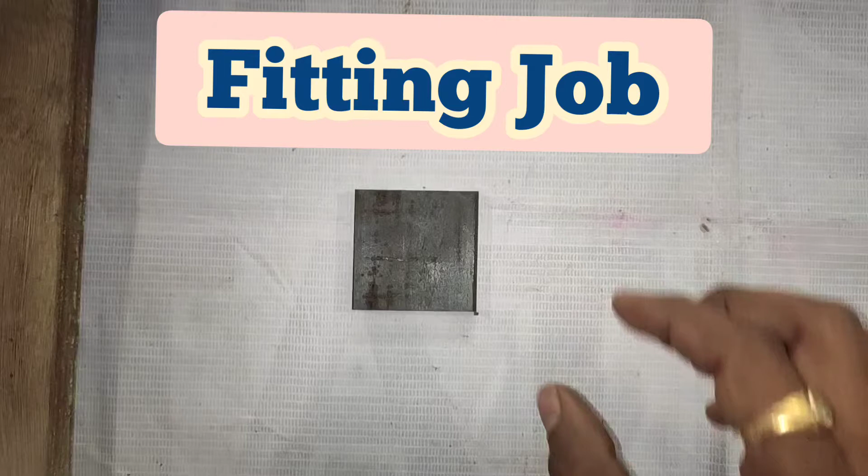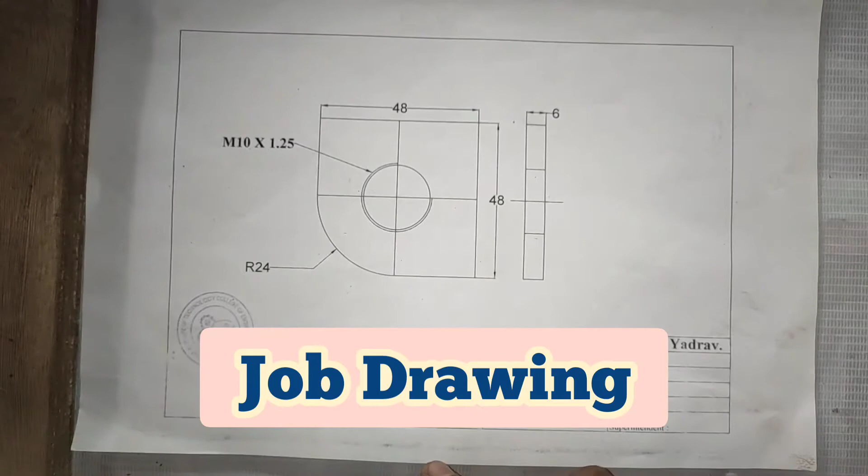This one is nothing but our initial raw material available with us. From this raw material, we have to do the final product of this fitting job. This is nothing but our drawing. From this drawing, we have to manufacture the job by using this raw material.

First of all, we'll take an overview of the tools which we are going to use for this practical. The equipments we are going to use are: first, the steel rule; this one is the vernier caliper; and this one is the digital vernier caliper. This first one is our steel rule.

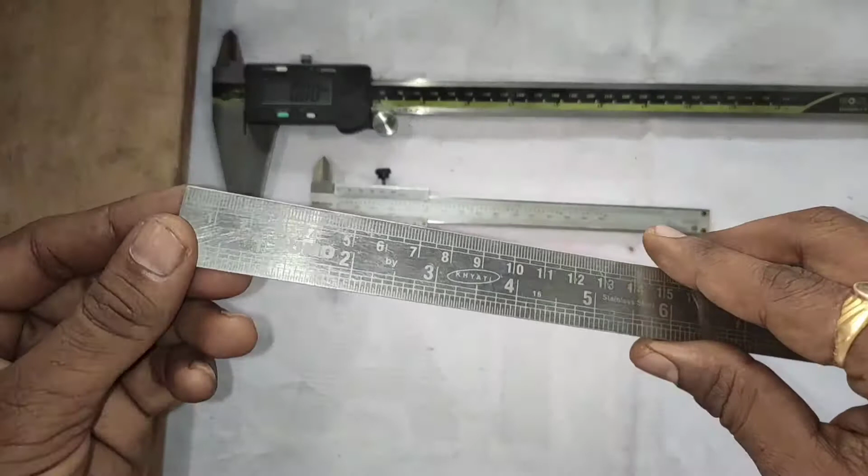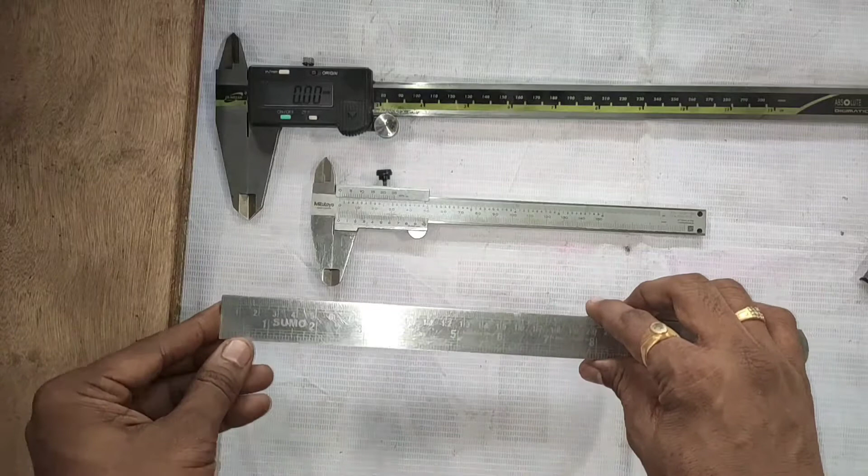Now if you observe on this steel rule, there are two scales. One is in centimeter, this particular one, and below that is in inches. This is the centimeter scale, and from this point to this point is 1 centimeter. Accordingly the scale is up to 15 centimeter and 6 inches. Now by using this steel rule, we have to take the initial readings of this raw material.

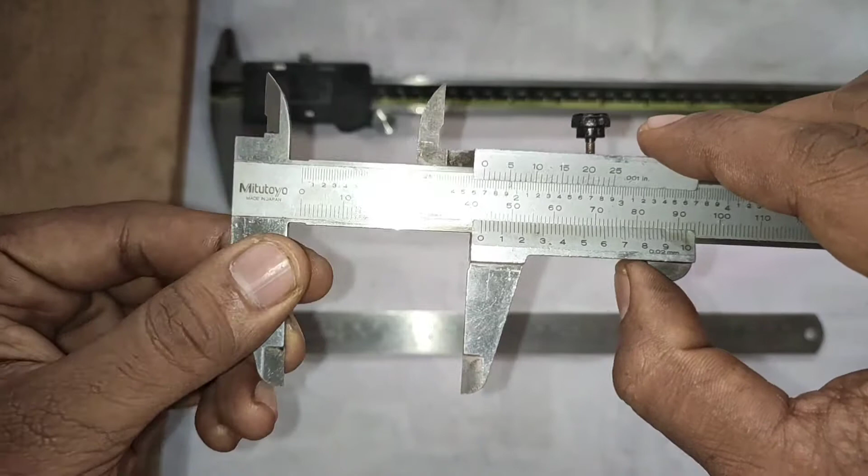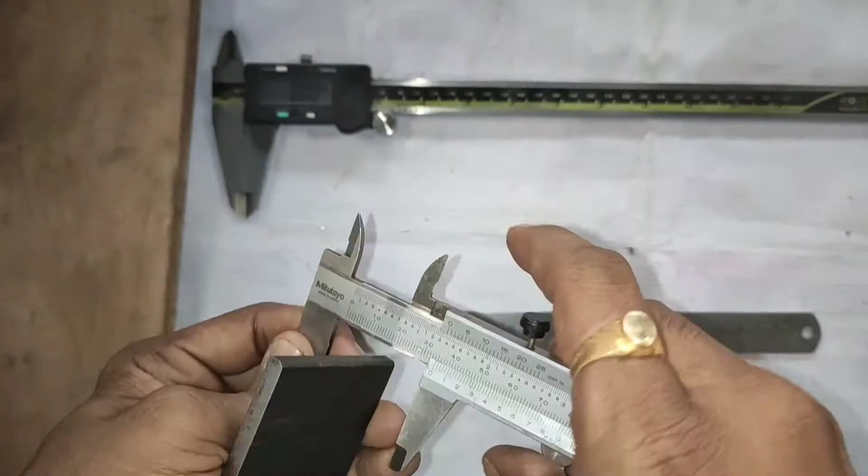Then next one is the vernier caliper. Why is this vernier caliper used? To get exact readings of the job, we have to use this vernier caliper. Now by using this vernier caliper, we have to measure the job readings, meaning different dimensions. This vernier caliper has two jaws, and in between these two jaws we have to place the job like this, and then measure the reading in this manner.

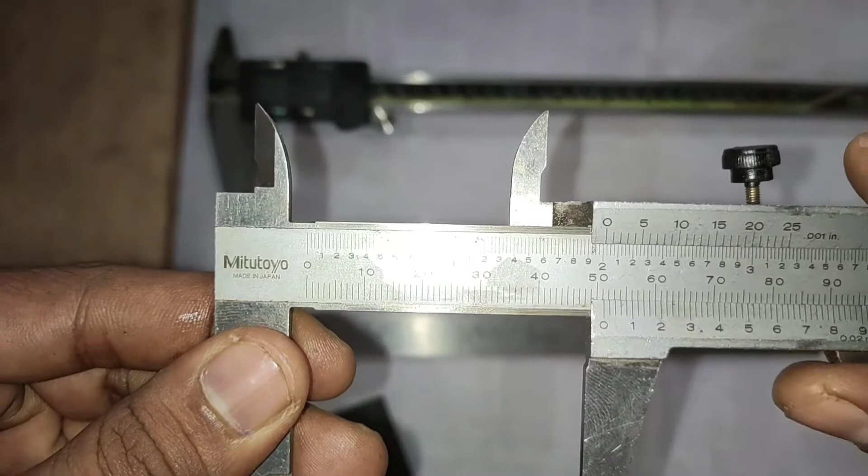Or if we have to measure the sides, we have to take the reading like this. Now if you observe on this vernier caliper, there are again two scales: this one is the main scale, and this one is the vernier scale. We have to take the readings at this zero point. If this zero point is matching at this 30 line, then that job has the dimension of 3 centimeter or 30 mm. If the job has the dimension matching exactly at 50, then that job has the dimension of 50 mm or 5 centimeter. So this is about the vernier caliper.

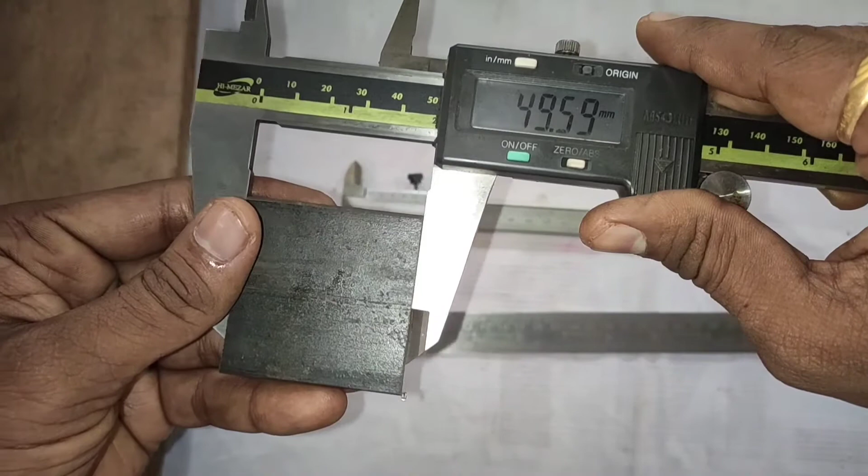Next, this one is the digital vernier caliper. This one is the manual vernier caliper where we have to take manual readings, and here the reading will be automatically shown on this digital vernier caliper. If you see here, in between these two jaws we have to hold the job and take the readings. If we hold the job like this, then the reading will be automatically shown on this display. So that is about this digital vernier caliper.

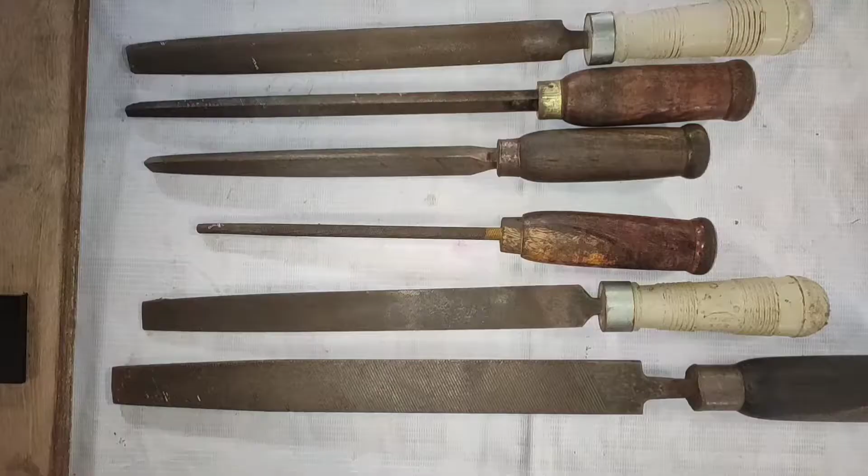The next tool is the files. These are the different types of files which we are going to use for this job. These files are used to remove the excess material from this job. Initially this job has the dimension of 50 by 50 by 6, meaning this dimension is about 50 mm, this also 50 mm, this also 50, meaning all dimensions are about 50 mm, and the thickness is 6 mm. Now from this job we have to remove the material, and for removing the excess material we have to use all these files.

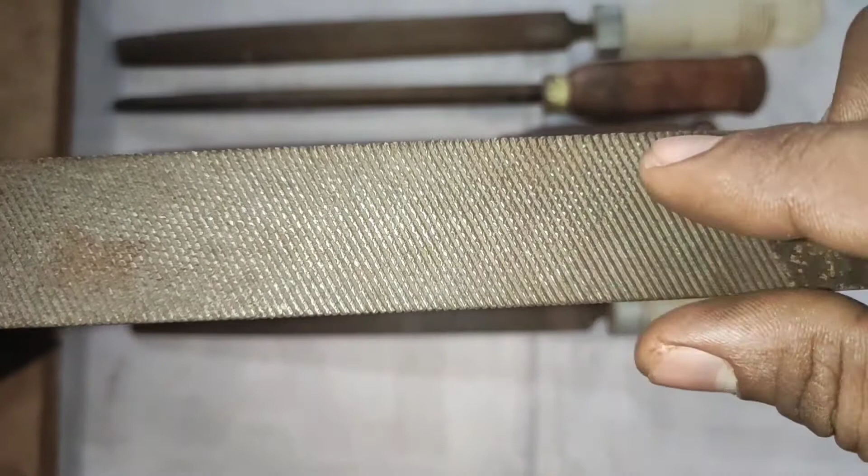The first one is the flat rough file. If you observe on this flat rough file, the markings or threads are somewhat big for this flat rough file. Then the next one is the flat smooth file. If you observe, the threads on this file are small, meaning the final finish will be made by using this flat smooth file.

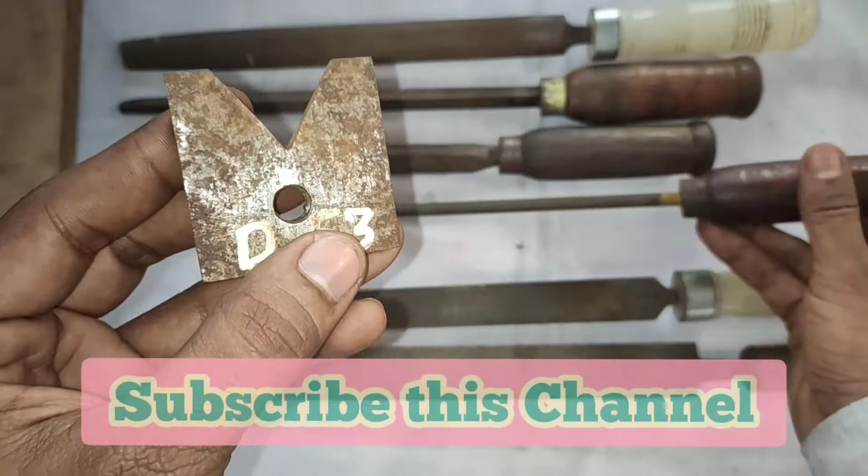This circular file is used if we have to make a hole in a particular job and make that hole smoother, we use this circular file. Now the next one is the triangular file.

If any job has a triangular shape like this, we use this particular triangular file. Then the next one is the square file.

If any job has a square shape, we use this square file. If we have to make a cut section like this square, we use this square file. For this particular job, if we have to make a smooth surface in between, we can use this square file.

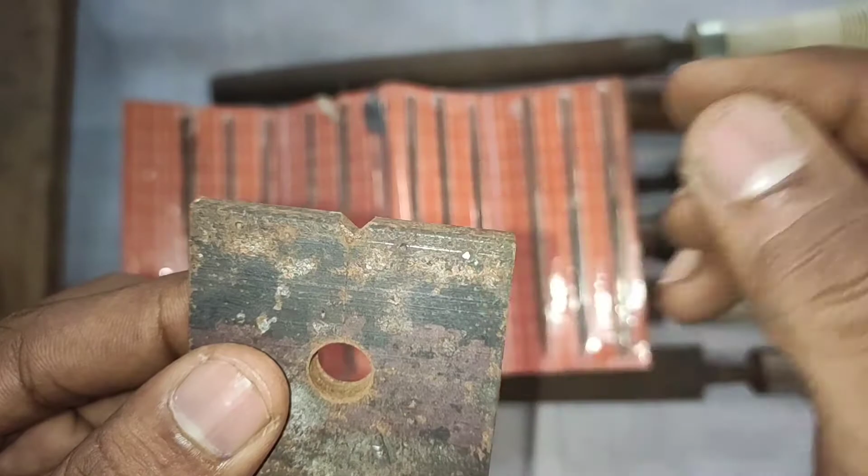Then this one is the half round file, which we use for this particular job. Also, these are different needle files which we use for making small cut sections in jobs. If you observe in this job, one small cut is made, so for that we use different needle files.

The next equipment or tools we are going to use in these practicals are: this one is the spring divider, then these are two punches, then a scriber, a drill, and this one is the tap wrench. Starting with the first one, the spring divider.

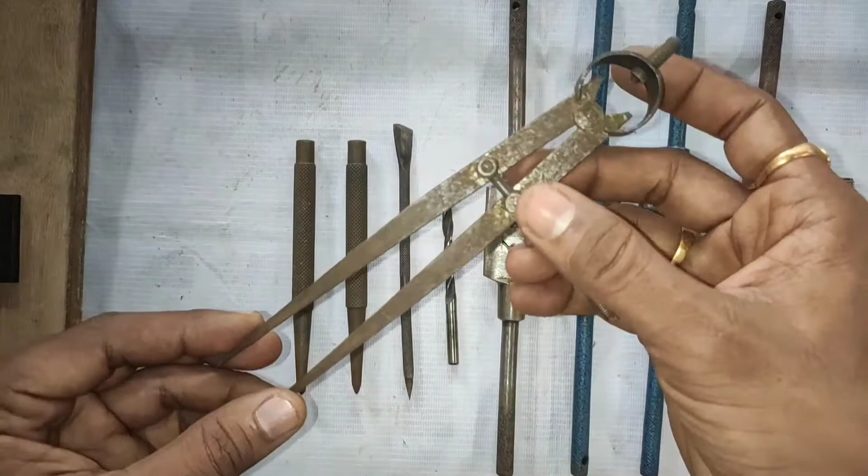If we have to make round markings, we use this particular spring divider. If you observe, with the help of the screw available on the spring divider, we can change its dimension.

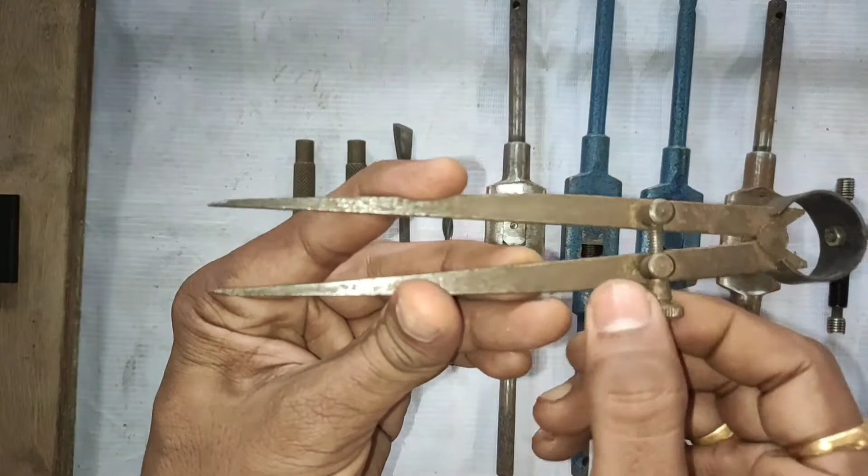If we have to mark a small marking on the job, we tighten this screw, and if we have to make larger markings, we loosen it. With the help of this spring divider, we can make round markings on the job.

This spring divider is a type of external caliper. With the help of it, if we have to make a round shape of 2.5 centimeters on the job...

If we have to make a round of 25 mm on this job, we use the spring divider in this manner. Here we take the 25 mm dimension between the two jaws, then place it at the center, and by using this spring divider we can make the round marking on the job.

Also, with the help of this spring divider, we can measure dimensions, or if any dimension needs to be measured, we can use this spring divider.

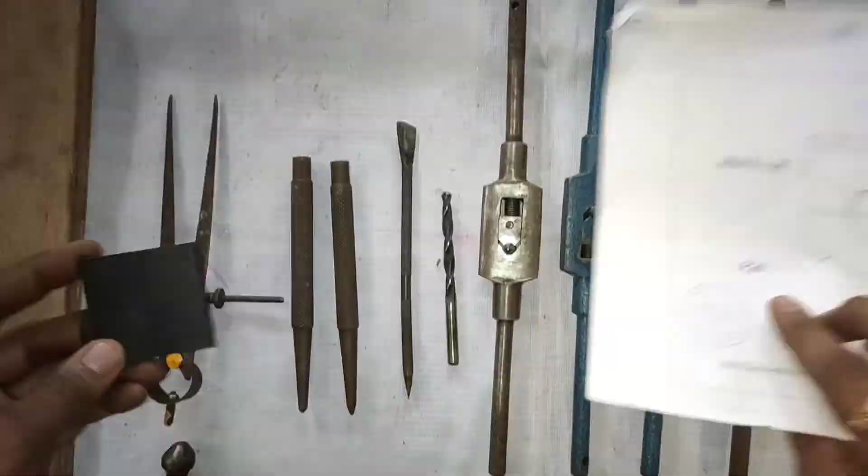Now where are the 45-degree and 60-degree punches used? On our job, we have to make markings at two points. If you observe, we have to mark the center, and also make side markings. For side markings we use the 60-degree punch, and for center marking we use the 45-degree punch.

Next one is the scriber. If we have to make longitudinal markings on the job, we use this particular scriber. By using this scriber and a scale, we can make markings on the job.

Okay, we have to make the markings like in this manner. So that one is nothing but about the scriber.

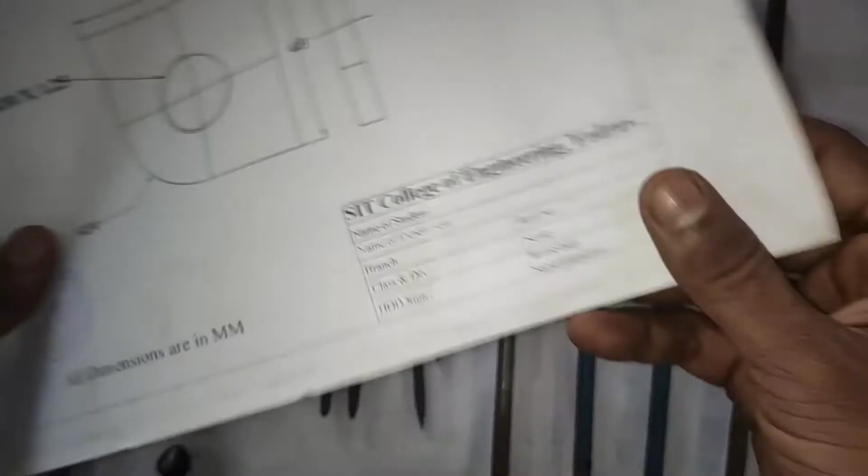Then next one is drilling. This one is nothing but our drilling tool, which is having a dimension of M8.5. Now this particular drill we have to use at this particular point, for making this particular hole we will use this particular drill.

Then next one, that is tap wrench. Now if you observe, this particular is nothing but the tap, and this particular is nothing but our wrench. So whatever holes we have made on this particular job, here we will make the hole by using this particular drill, and for the internal threading we will use this particular tap wrench. Now these are some types of taps - this one is first tap, this one is the second tap, and this one is the third tap, which we will use for this particular job.

Then here also this one is nothing but the ball peen hammer, which we will use for hammering purpose while punching. Means whatever punch which we are going to use on this particular job, for hammering we will use this particular ball peen hammer.

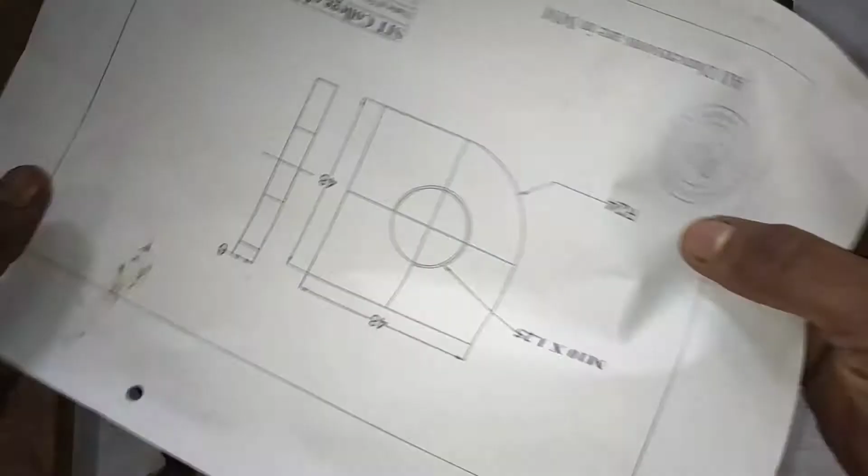Then next one, that is nothing but the go gauge and no go gauge. Whatever holes and internal threads we have to make on this particular job, that will be cross-checked by using this particular go gauge and no go gauge. This particular go gauge will pass through this particular hole, and this no go gauge, that it should not pass through that particular hole. That is for this go gauge and no go gauge, which we are going to use for this particular job.

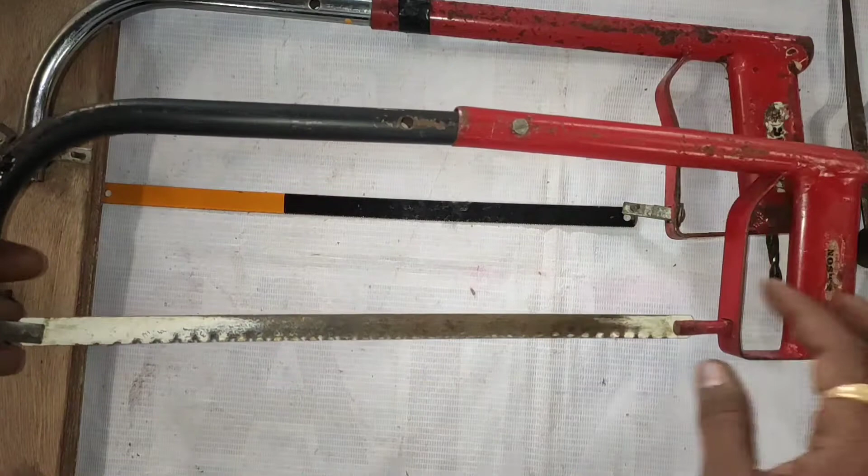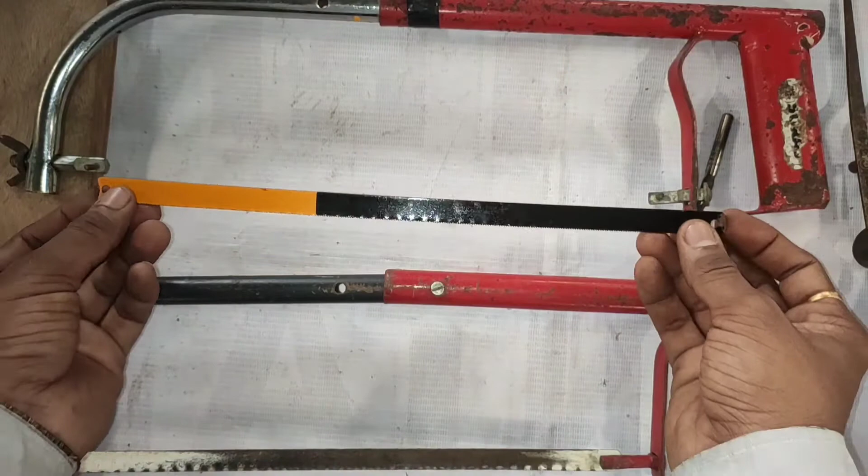Then the next equipment that we will use for this particular job is nothing but the hacksaw. Now here if you observe, this particular is nothing but the frame, and this particular is nothing but our blade. We have to fix this particular blade on this particular hacksaw. Now we will fix this blade - here in between these two holes we have to fix this particular blade.

After fixing, just we have to tighten this. By making this tightening operation, this particular blade is fixed on this particular hacksaw frame. Now this particular blade is having only one side blade, and this particular blade, it is two-sided - means from both sides we can cut the material.

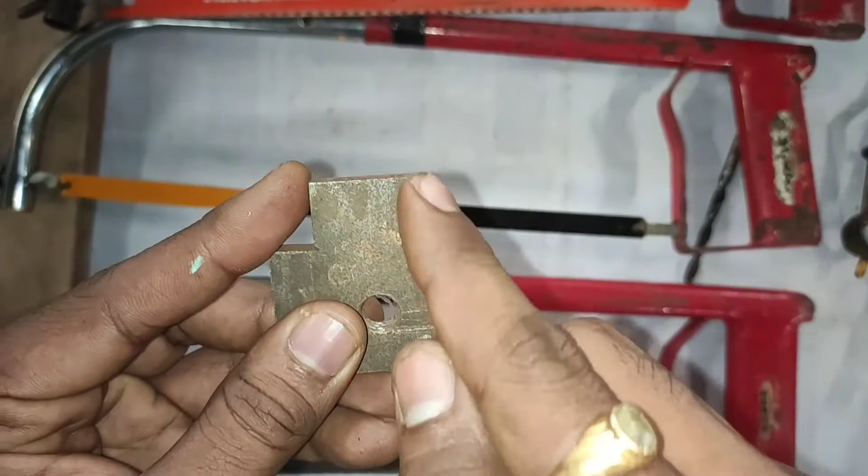Now where this particular hacksaw is used - if we have to cut the job like this, in that case we can use this particular hacksaw.

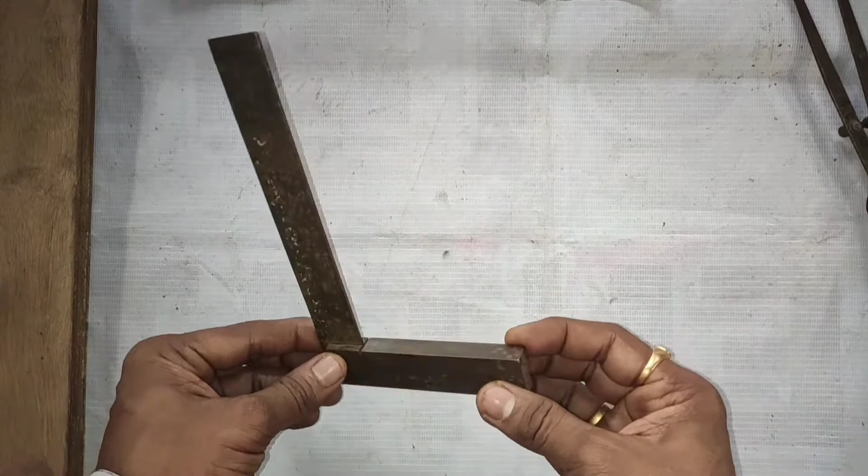The last equipment which we are going to use for this particular job is nothing but our tri-square. Now why this particular tri-square is used? To make all the angles at 90 degree, we have to use this particular tri-square. Means here we have to fix this job like this, and if there is no gap in between these particular faces, then that job will be at the right angle. Here if you observe, some space is there, so these two sides are not at right angle.

Now this one is nothing but our actual job drawing. Whatever the drawing, here if you observe, this particular is the side having 48 by 48, and the angle here is of 90 degree. So for making that angle at 90 degree, we have to use this particular tri-square.

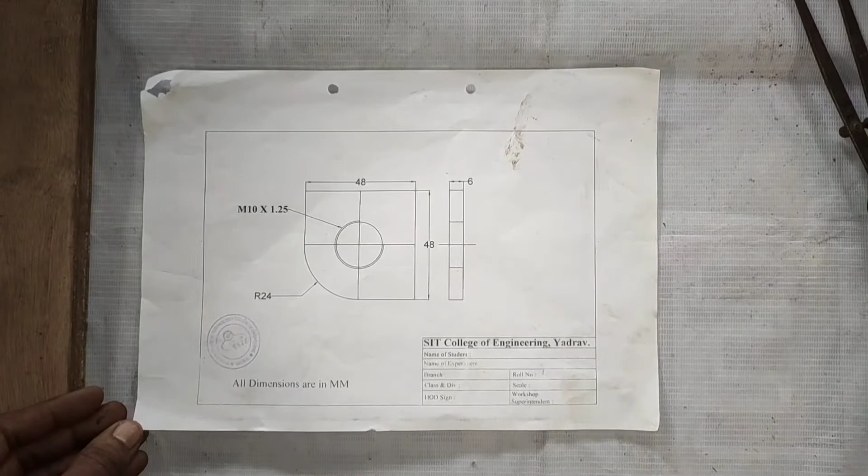Now we'll start our actual operations of this particular job. This particular is nothing but the bench vice. Now on this particular bench vice we'll fix our job.

Now if you observe this particular bench vice, there is this particular handle which will rotate in clockwise direction and anti-clockwise direction. If that rotates in anti-clockwise direction, then these particular two jaws will separate from each other, and if we rotate in clockwise direction, then these jaws will close together. Now we'll fix our job on this particular bench vice.

Here this job is fixed on this particular bench vice. Now first of all we'll make this particular side, and then the next side will be this. So for making these two sides of 48 by 48, we'll use the flat file.

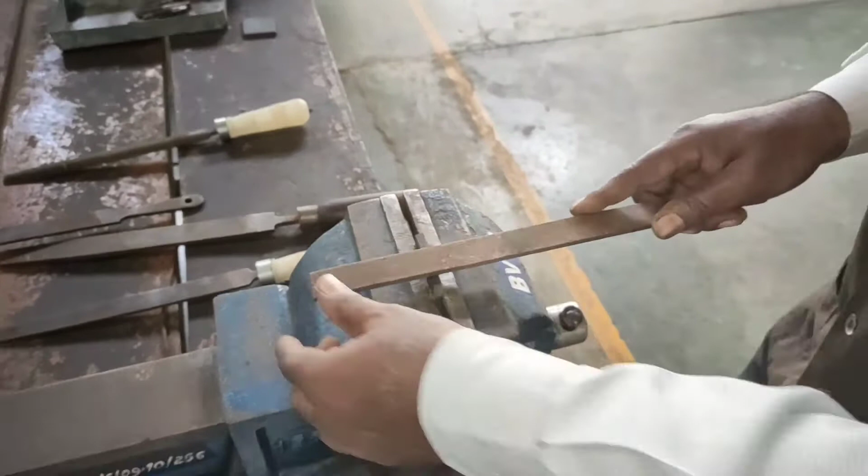Now this particular flat file will first of all make the first side like this manner. So we'll use this particular flat file and we'll make the side smoother in this manner.

Okay, now here we have made the first side plain, and also we have made the finish of this particular first side. So we are done with this first side. After that, next we have to do this second side, so we'll remove the job and take the second side onto this bench vice.

Now we have to make this second side plain and smoother with the flat file and finish file. Also we have to make these two sides at 90 degrees, so here we have to use the tri-square.

So first of all we'll make this face smoother with the filing operation. Now with the help of the draw file we'll make the second side smooth and finish. So now we'll check with the help of the tri-square that these two sides are at right angle or not.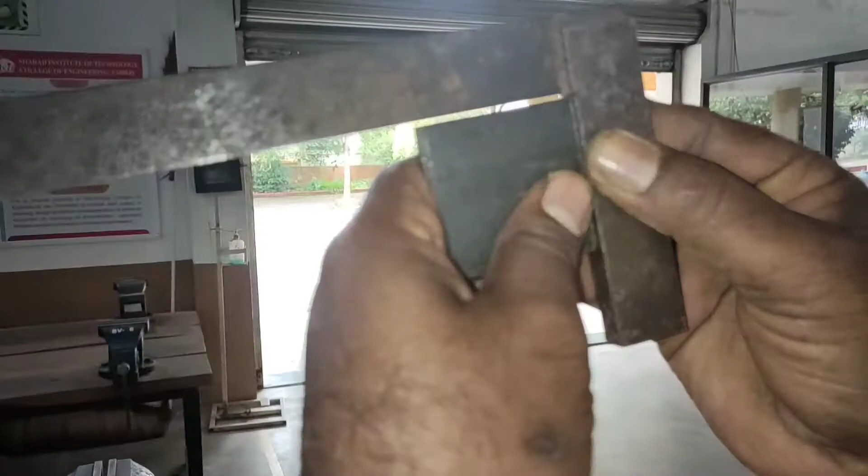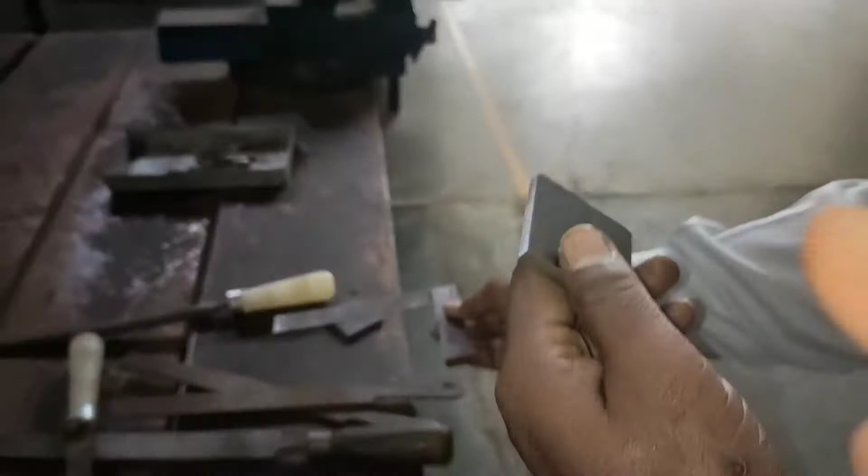Here if you observe, there is no gap in between these faces, so these two sides are at right angle. So on this particular job we have made these two sides at right angle.

Now after that, next we have to make all the sides of 48 mm. The initial reading is 50 mm, so we will make all sides 48 mm. Now these two particular sides, this side and this side, are at right angle.

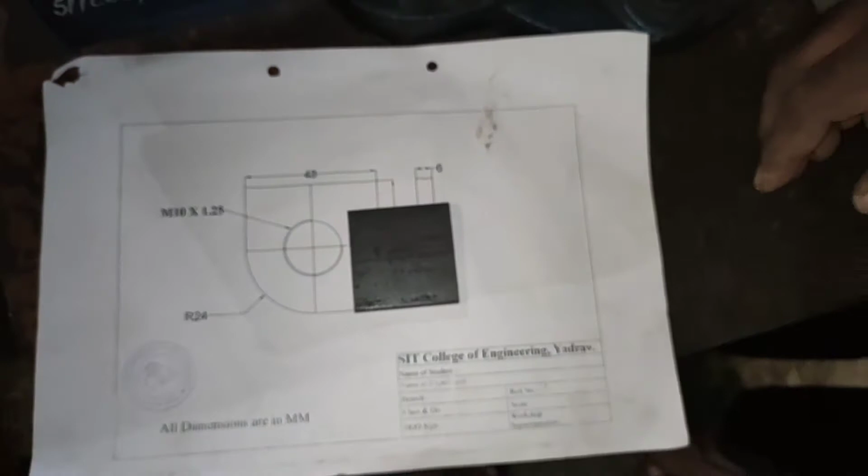So avoiding those two sides, we will make the marking on this third side and this fourth side, having a dimension of 48 mm. For that we will use the punch and hammer on the surface plate.

This is our surface plate on which we are doing the marking on our job. If you observe on this height gauge, we have made a dimension of 48 mm here. This zero marking is matching at this 48, from this 0 up to this 48 mm.

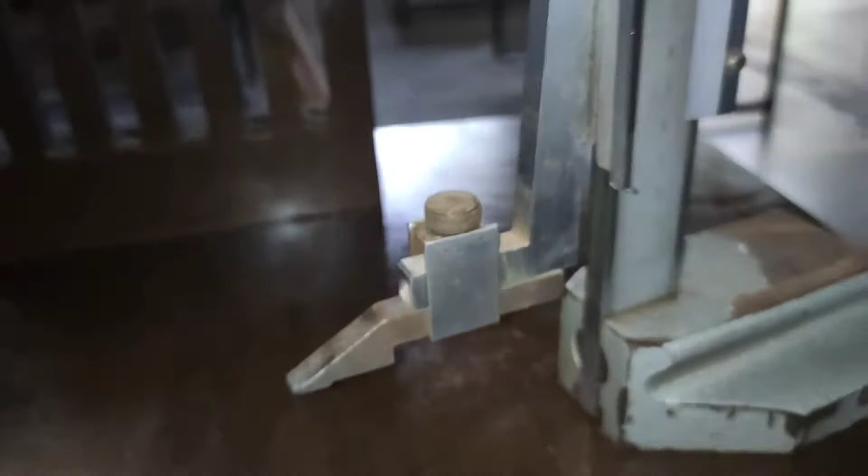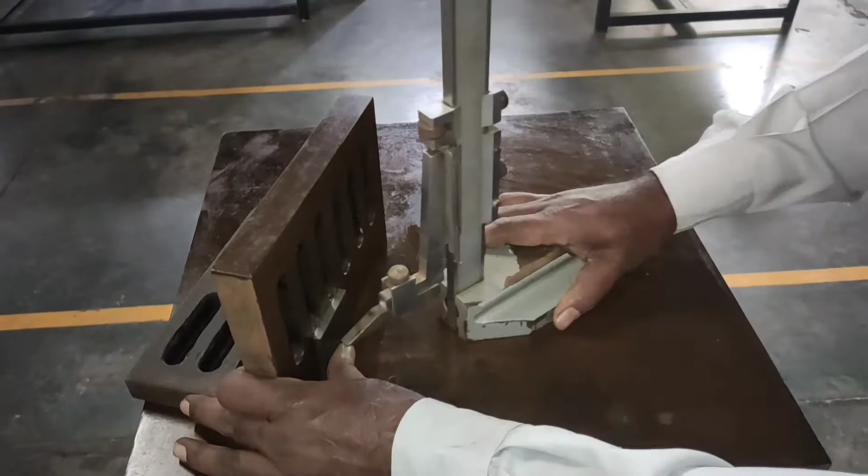Now after fixing that 48 mm dimension, on this job we will do the marking. We will fix this job and do the marking here. This is nothing but our marking operation. On the first side we have made the marking, and then on the next side we will do the marking.

Now if you observe on this job, we have done the markings. These are the markings of 48 mm, on the third side and fourth side.

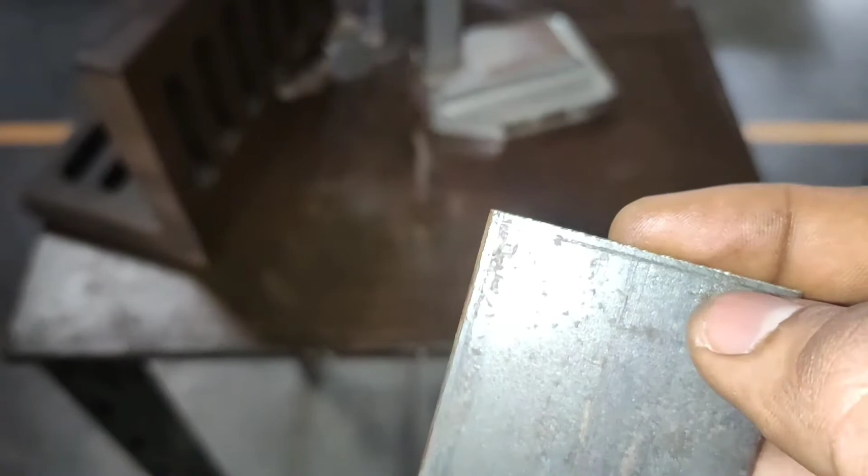Now with the help of a punch we will do the marking on this third side and fourth side, using a 90-degree punch. Now on this job, with the help of a dot punch, we will do the markings using punch and hammer.

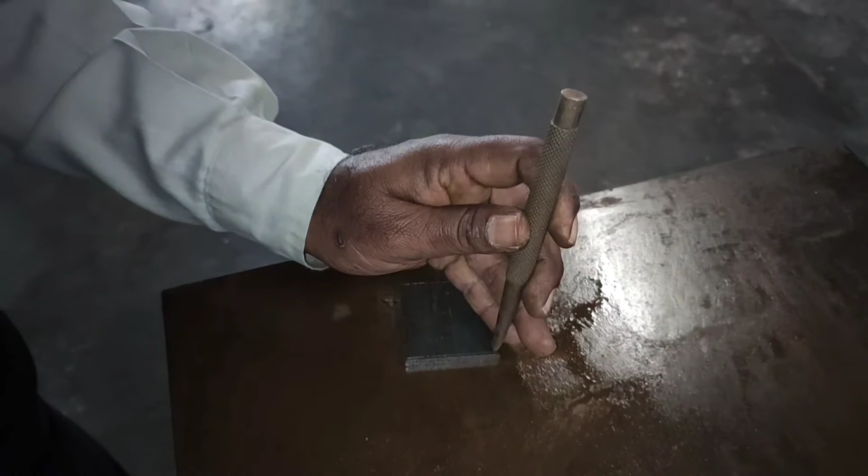In this manner we have to make the markings on this job. Now we have made all the markings on this third side as well as on this fourth side with the help of that dot punch and hammer.

Now we have to remove this excess material from this job by using the hacksaw. Now here we have to remove this excess material with the help of filing. By using the filing operation we have to remove this excess material.

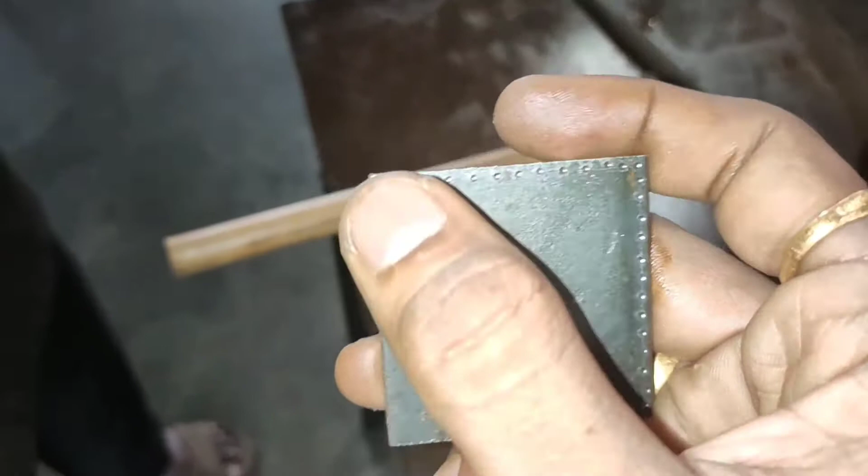So here again we have to do the filing operation on this third side and fourth side. Here we are doing the filing operation on this third side.

Now here up to this particular mark we have to do the filing operation, meaning up to the marking which we have made with the dot punch, we have to remove the excess material.

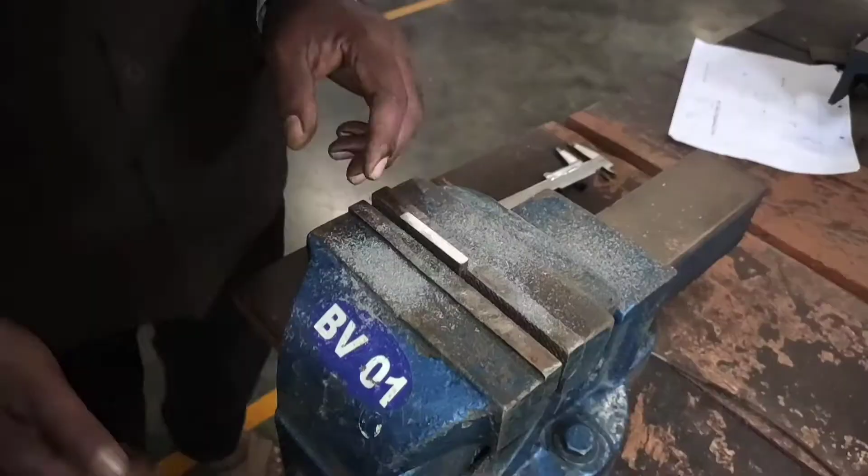Now up to this marking, if you observe, we have removed the excess material of this third side. Now we will make the fourth side.

Here we will check the size of this side, that is having a dimension of 48 by 48 mm, approximately 48.23. That is feasible.

Now here we will use the draw file for making the final finish. This is with the help of the draw file we are making the final finish on the third side. Now here we have made the third side of 48.06 mm, that is approximately 48 mm.

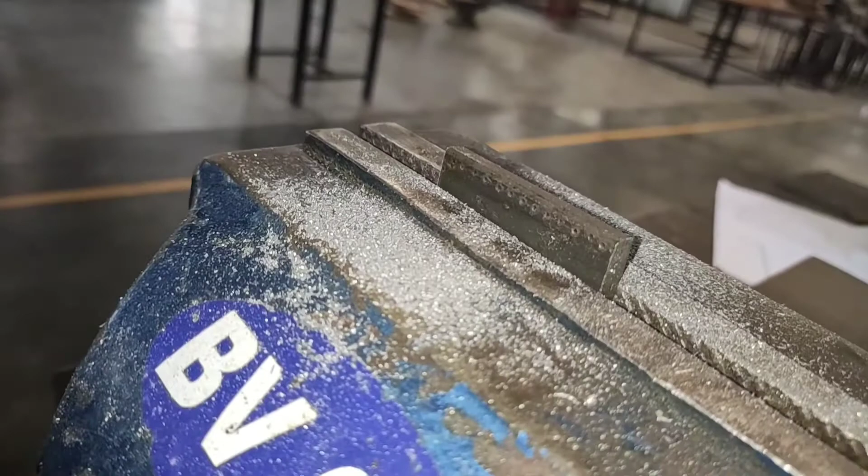Now we will make the fourth side, meaning this particular side. Here we have made markings on this job, and up to that marking we have to remove the excess material of that side. So here again we'll mount the job on bench vice, and then we'll do the filing operation on the fourth side, up to this particular marking, to remove the excess material.

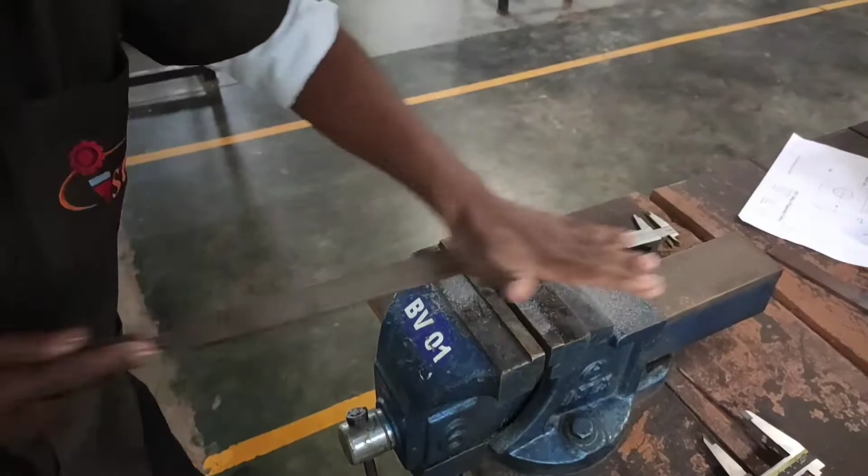So here on the fourth side again we are using the filing operation. Now our fourth side, also up to this particular marking, we have removed the excess material of this fourth side.

Now here all the sides of this job are of 48 mm. Here these are the two sides, the first and second side, which we made earlier smooth and finished. After that, with the help of a tri-square, we made this at right angle, and then with the help of a dot punch we made the markings for all the sides of 48 mm.

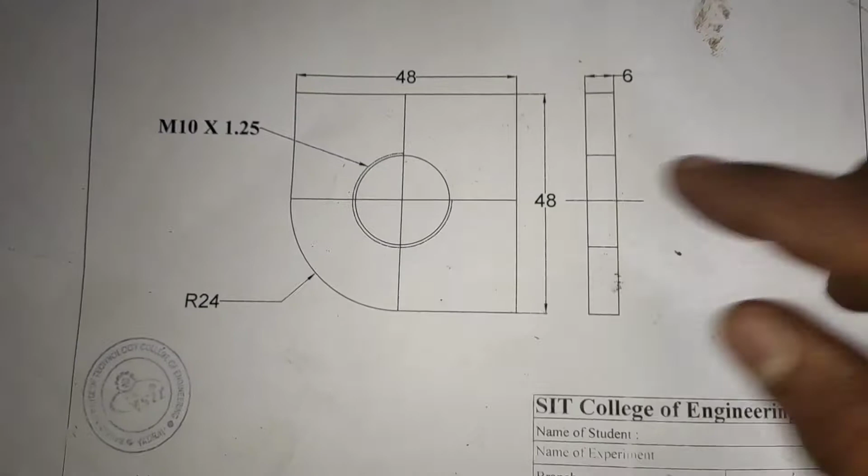From all the sides we have made 48 mm. After this next operation, we have to make a hole at this center point, and also make this particular round shape. For that purpose we have to make markings on this job. So now we will mark this center point, and with the help of a spring divider we will make the round marking on this side.

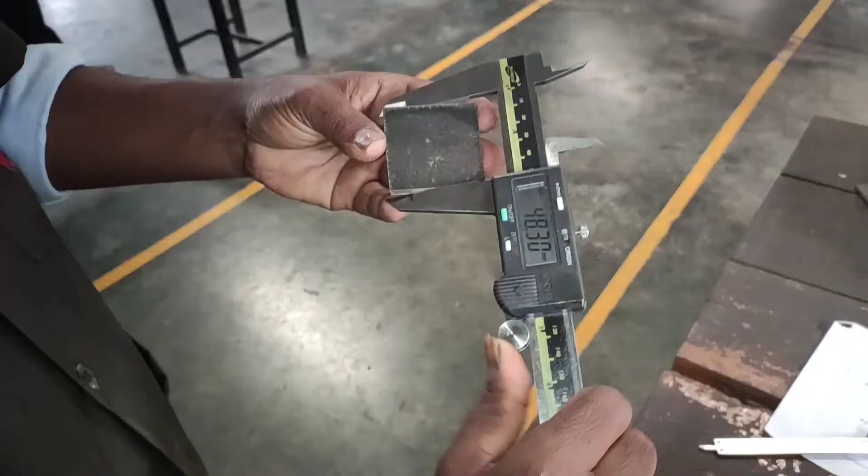Now here we have made all the sides of 48 mm, meaning all sides are 48.2 or 48.3 mm approximately. Now the next operation is the marking operation.

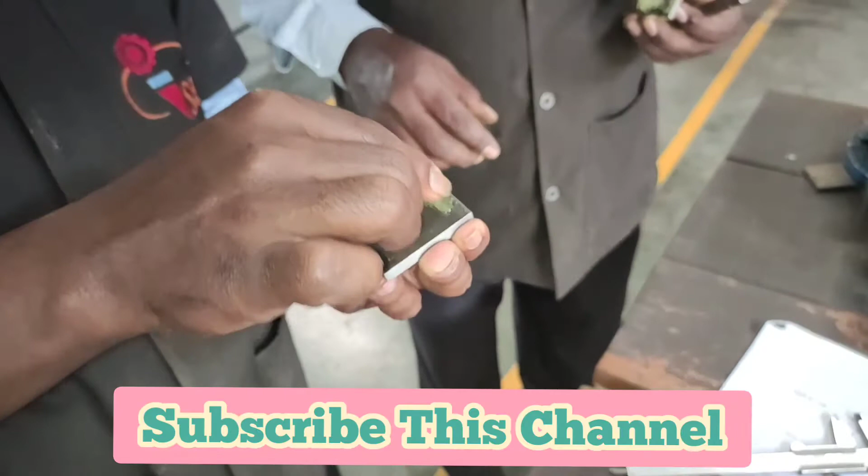For that purpose, with the help of wet chalk, we will apply that wet chalk on this job for marking purpose. Whatever markings we do on this job need to be seen while doing the other operations. So for that purpose here we will apply the wet chalk on this job.

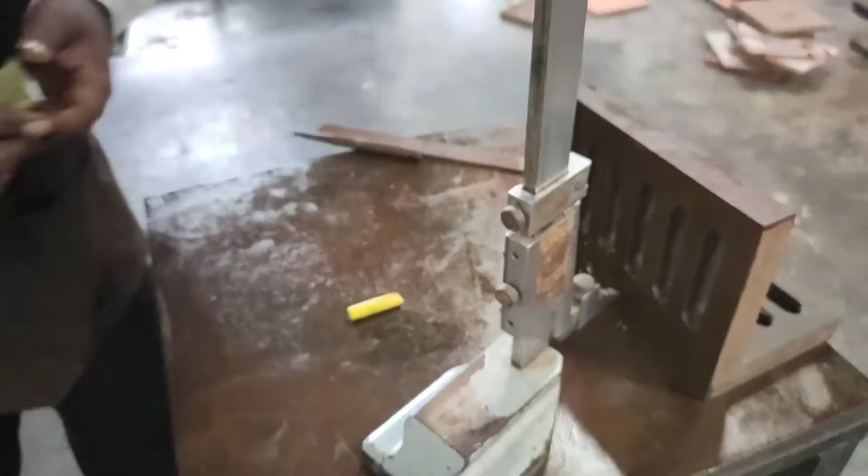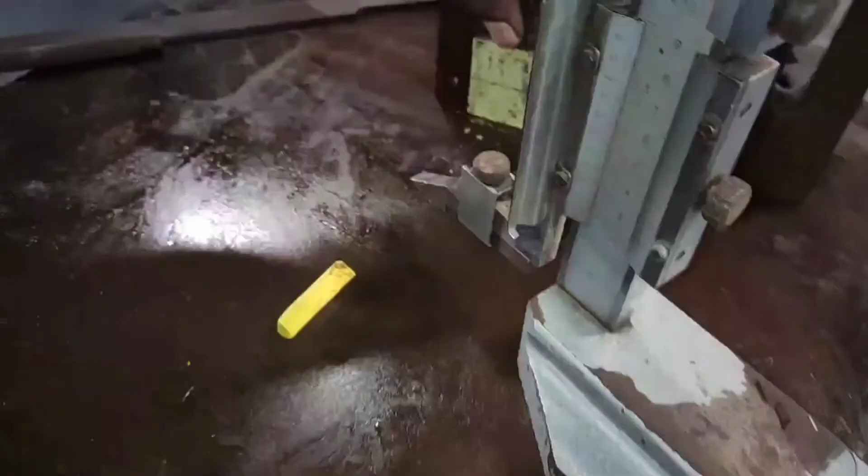Now here on this surface plate, with the help of a height gauge, we will set the dimension to 24. Here we have made the 24 mm dimension, meaning for the middle point of 48 mm, we have fixed 24 mm on this height gauge, and here we will make the marking operation like this.

After that, on the second side also we will make the marking operation.

Now here at this point, these are the two lines, vertical and horizontal, meaning this point is nothing but the center point of this job. Now we have made the vertical and horizontal marking.

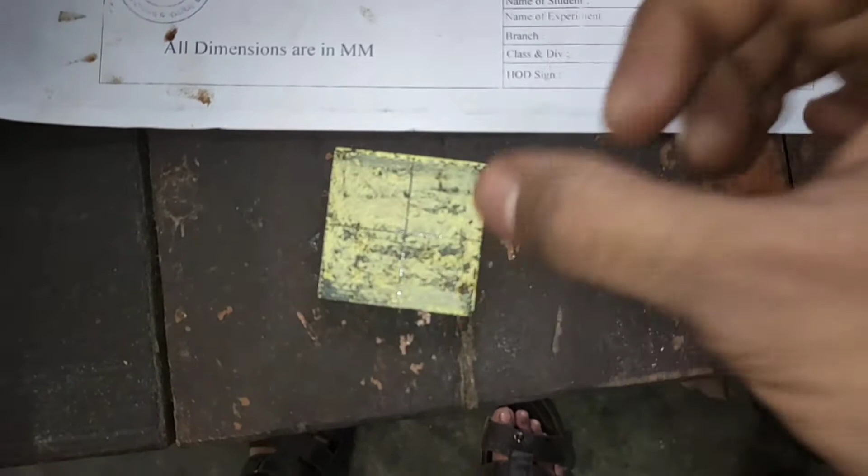Now if we observe the drawing, at this point we have to make the hole. So with the help of a drilling machine, we will make the hole of M10 by 1.25. Also, for this round operation, or for making this round surface, with the help of a spring divider we have to put one point at this center point and do the round marking on this job. So we will do these operations now.

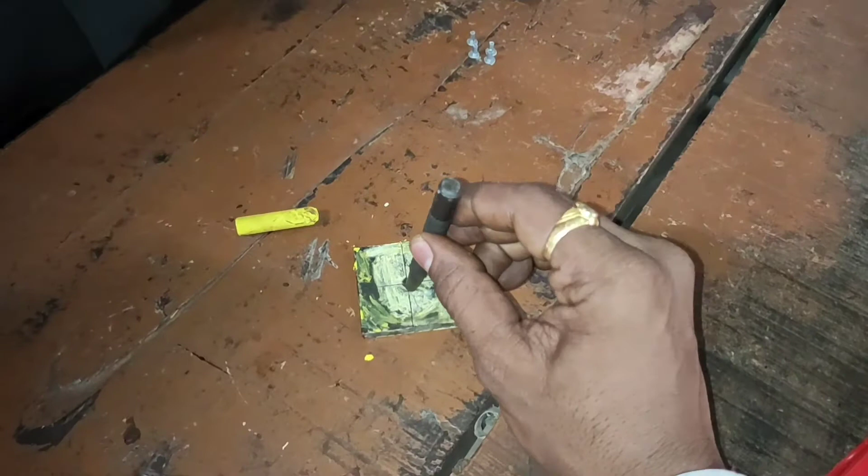Now with the help of this 45-degree punch, here we have to do this operation. At this center point we will do the hammering. With the help of a hammer and dot punch we will make this marking at this point, and after that we will do the round marking on this job.

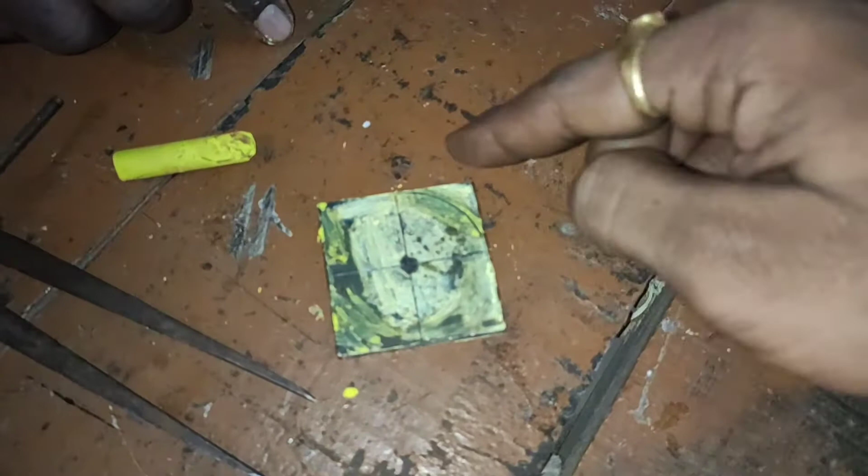In this spring divider we have taken the 24 mm distance, for this round shape. Now this round marking is also done on this job.

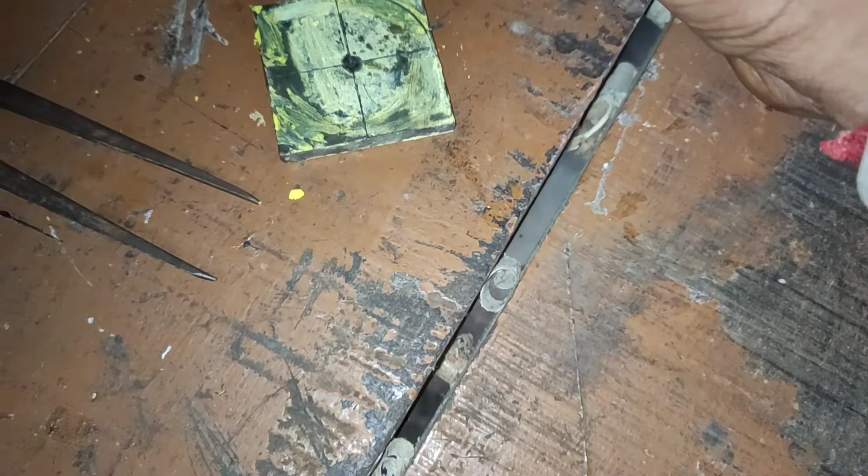Now with the help of the dot punch, on this round surface also we will do the marking on this job. Now on this job we have made markings in this round, circular manner. Here with the help of this dot punch we have made the markings on this job.

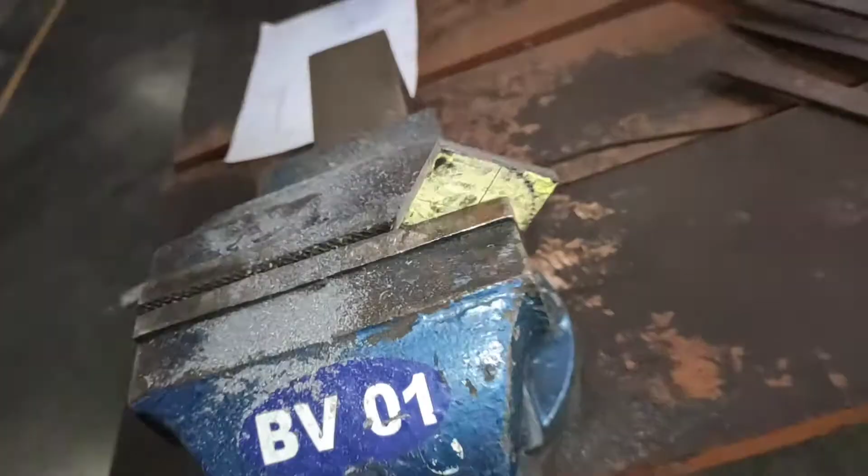Now here we have to remove this excess material. So for that purpose we will use the hacksaw and filing operation. Now we have fixed this job on this bench vice, and here we have to remove this excess material with the help of the hacksaw.

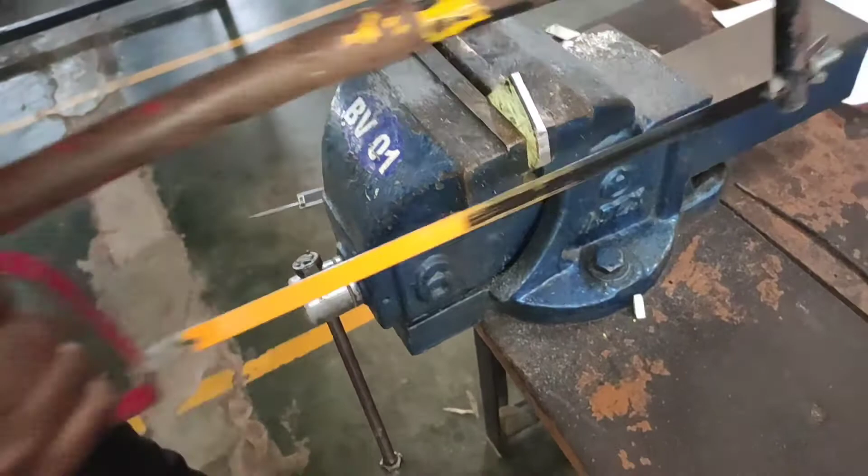Here with the help of a hacksaw we will remove the excess material. Now we are removing the excess material, and here we have removed this excess material.

Now again we will use the filing operation to make it accurate. Here on that particular round surface we are removing the excess material. Whatever excess material is on the round, circular shape, that will be removed by using this particular filing operation.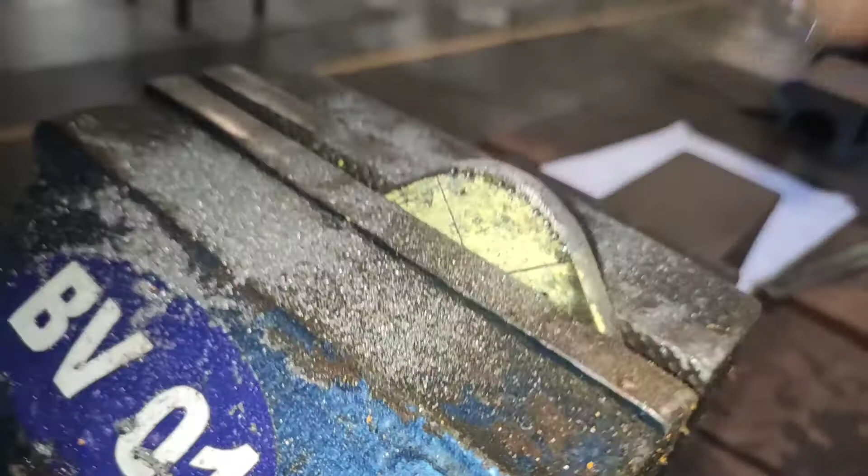Now up to this particular marking we have removed the excess material by using the filing operation. With the help of draw filing, we will make that particular surface smoother and finally finished.

Now with the filing operations we have made this particular round, circular shape on this side. Now the next operation is to make a hole at this particular center point, and also we have to do the tapping operation on that hole.

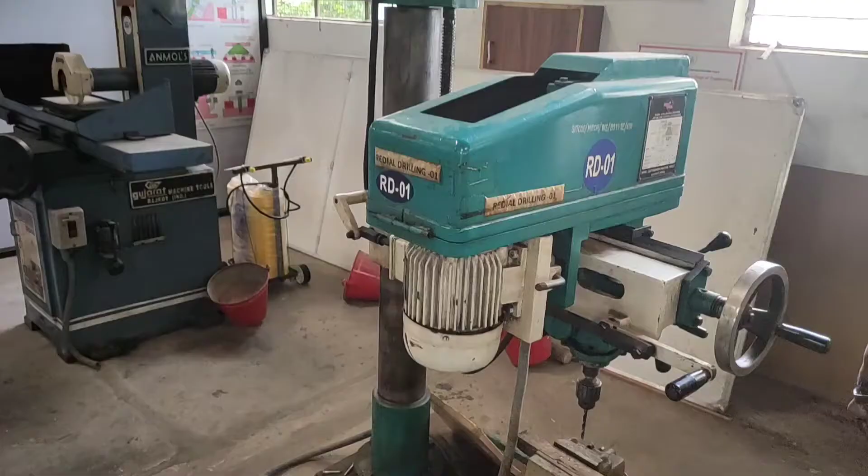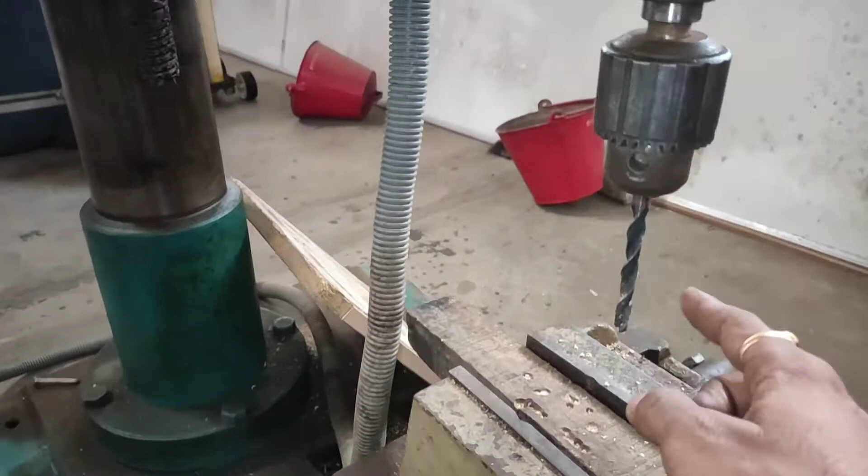With the help of the drilling machine we will make the hole at this particular center point. This is our drilling machine, that is the radial drilling machine. On this drilling machine, this is the motor, this is the drill, and this particular one is the 8.5 mm drill. With the help of this handle we will make the up-down movement of the drill.

Now in between these two jaws we have to mount our job. Here we will mount this particular job, and at the center point we'll do the drilling operation. We'll check this first, and then the drilling operation will be carried out.

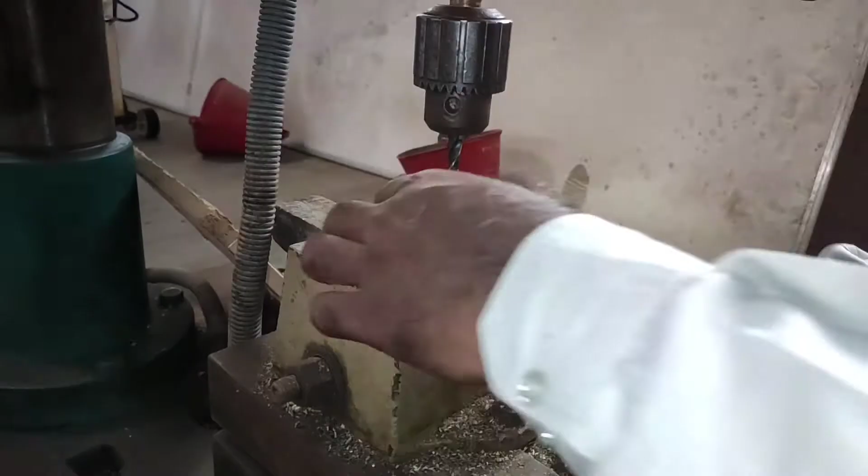Here the drilling operation is carried out. If you observe on this particular job, a hole of 8.5 mm is made. Now the next operation is the tapping operation.

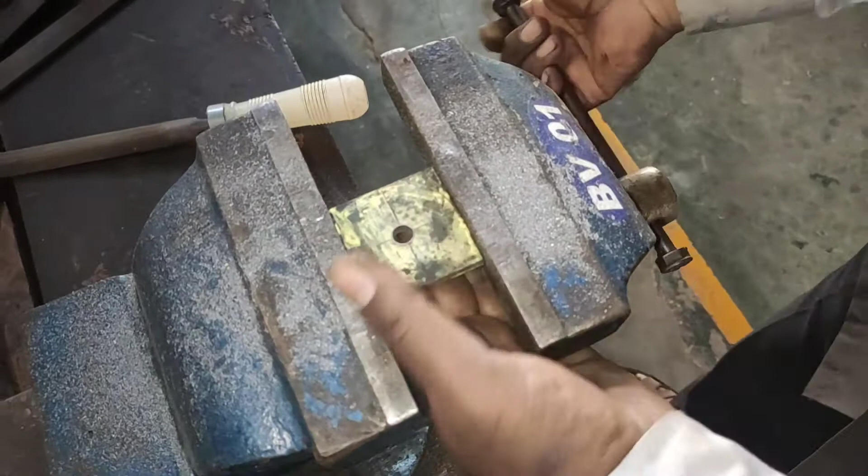For that purpose we'll use the tap wrench. We'll fix this particular job in the bench vice for the tapping operation, like in this manner, and now we will make the tap on this particular job.

Now with the help of this tap wrench we will make the tap of M10 by 1.25. With the help of oil and the tap wrench we'll carry out this particular operation, for making the internal threads on that particular job.

Now if you observe on this particular job, the internal threads were made by using this tap wrench, for fitting of that particular job.

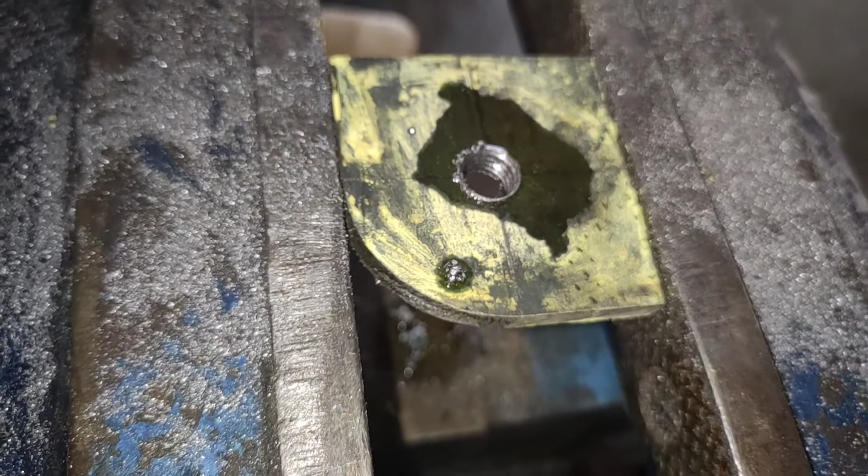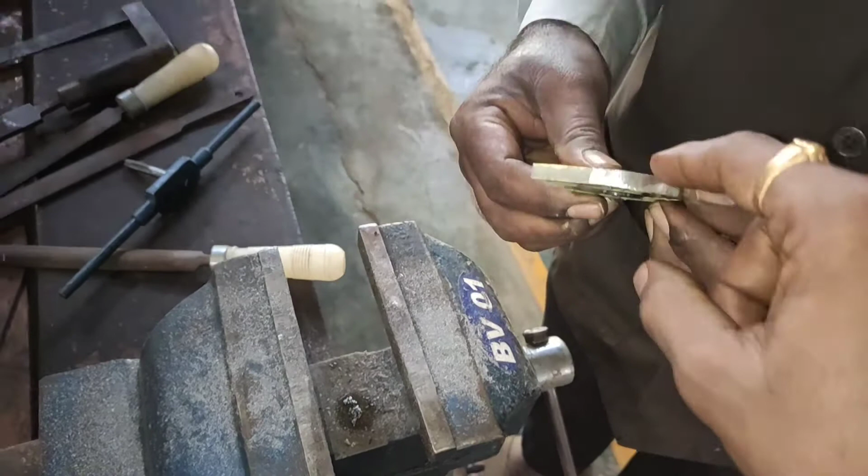Now we'll remove this particular job and make all the sides, this side and also this side, smooth and finished. For that purpose we'll use the smooth file, and by using that smooth file we'll make all the sides of that particular job final or finished.

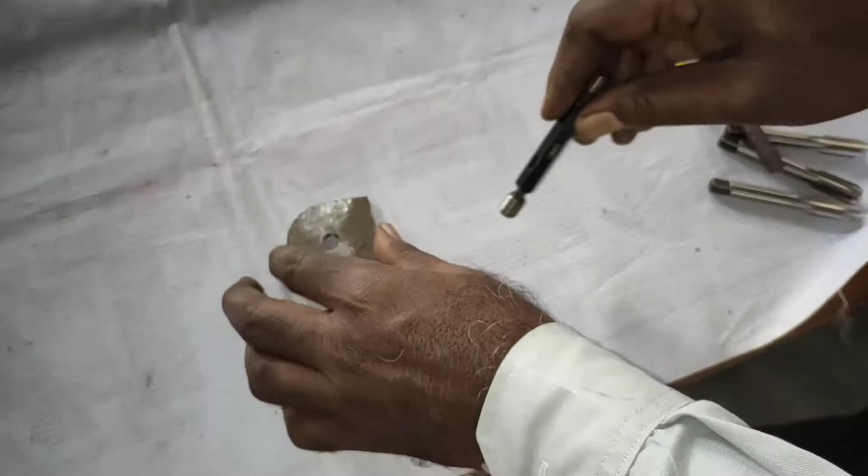Now after making all the sides finished, the job will look like this. Now the last operation of this particular job is, with the help of this go gauge, we'll check whether the job is accurate or not, meaning whether the threading we have made is accurate or not.

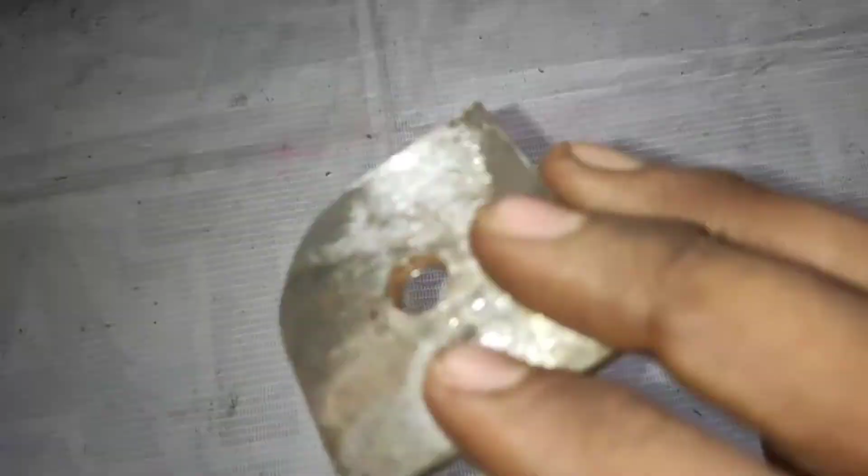So this is our final job, on which we have made the hole, rounded this particular surface, and made all the sides of 48 mm according to our drawing.

Now this is our drawing, the job drawing, and this particular one is our final product which we have made.

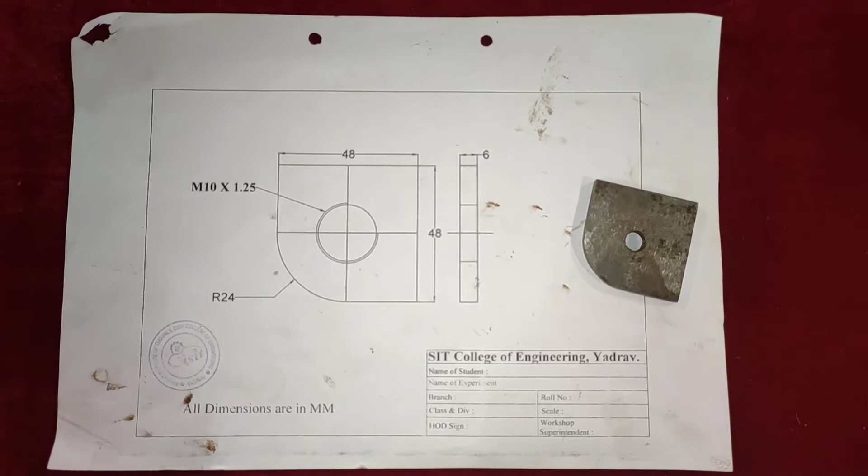Now for the submission purpose you have to write the following things: first, the shop, meaning which job we are doing, then the type of job, which is Fitting, the fitting job. Then the third thing to write in the write-up is material required, fourth is tools used, fifth is instruments used, and last is the process.

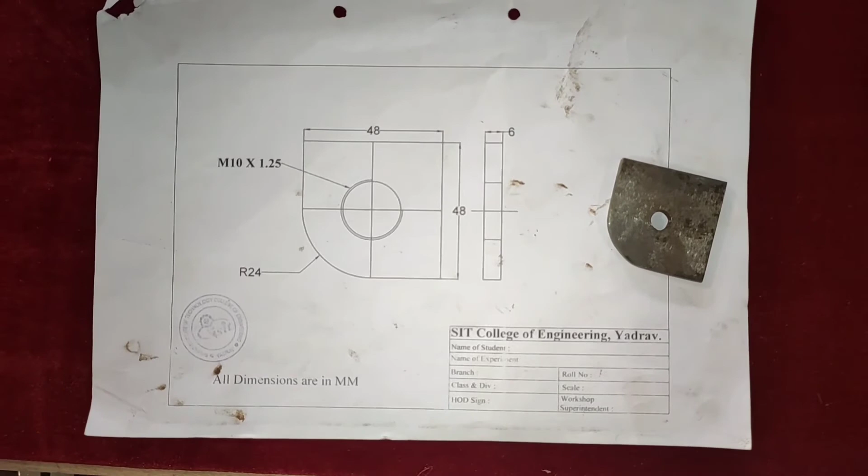You have to write all these things in your write-up, and along with that you also have to draw this particular job drawing in your write-up. So this is all about this fitting job. You have to write all these things in your write-up.